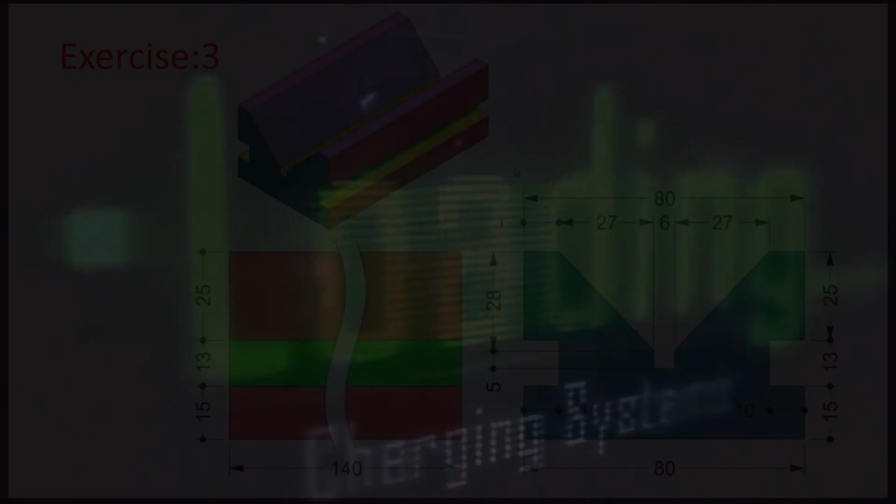Let's get started. Hello viewers, this is our third exercise using Autodesk Fusion 360. This is a very simple model. We will sketch half of the model, mirror it, and finally extrude it with a specific depth of 140 millimeters. Let us start our modeling using Autodesk Fusion 360.

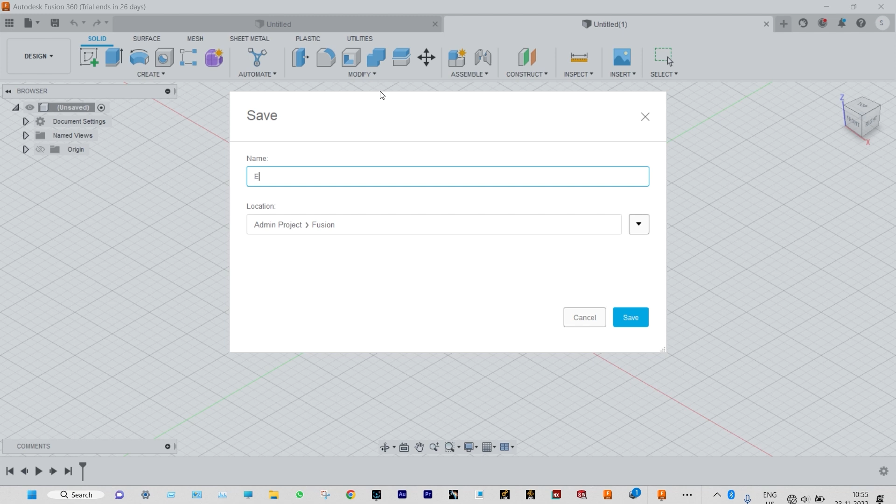First of all, we need to create a new design and save it with the name exercise 3, in a folder named Fusion. Let us save it. You can see the model is named exercise 3. While starting sketching, as we told before, we need to start from the front plane, selecting front plane. Okay, done.

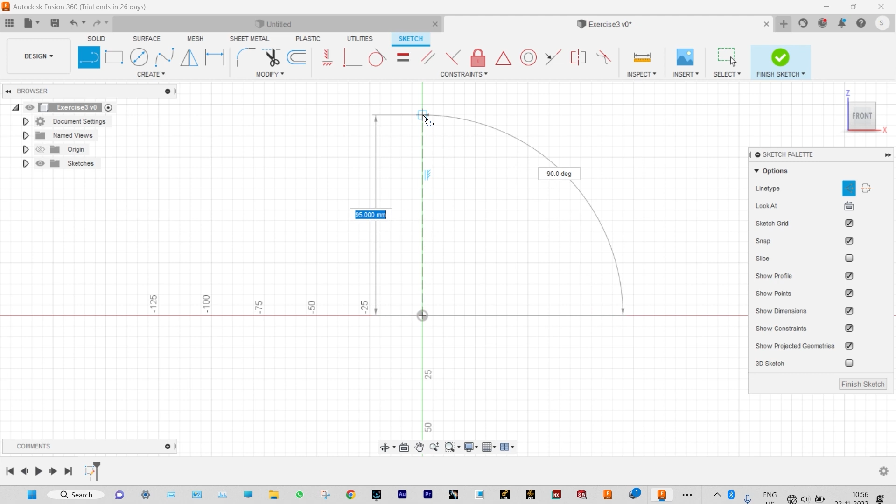As we told, we need to make one half of the model and mirror it. So initially we'll make one reference or construction line, with respect to which we need to make a mirror of that sketch. We select construction line from here and make a line. This will be the reference for the mirror line. Now we need to change the line type from construction line to a solid line. You can see the drawing again for understanding in a better way.

Initially, we need to move from this down position horizontally 40 millimeters because total length is 80, so we'll start here. It will be 40 millimeters. Then it will move vertically by 15. Again horizontally, it will move to the left by 10 millimeters. Next it will move vertically by 13 millimeters. This way it will move, right?

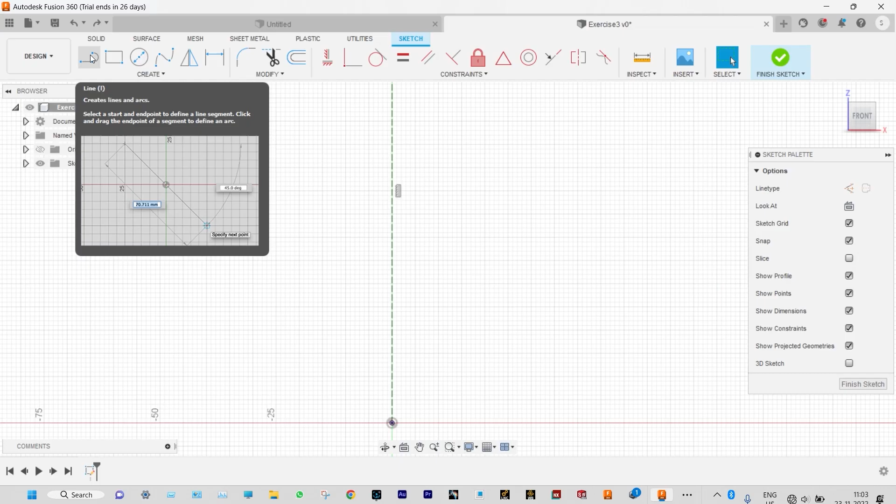So we are starting with a solid line. From this location, we need to move horizontally to a length of 40 millimeters. Enter. Now from here, move vertically up to a height of 15 millimeters, write 15 and enter. Again move to the left a length of 10 millimeters, write 10 and enter. Now move vertically up to a height of 13 millimeters, write 13 and enter.

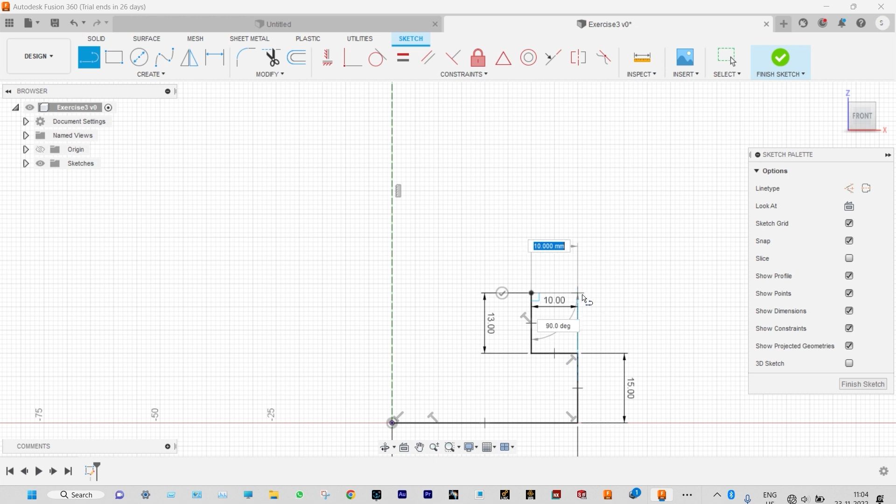Again move horizontally to the right a length of 10 millimeters, write 10 and enter. Then move vertically up to a height of 25 millimeters, write 25 and enter. Then again horizontally move left by 10 millimeters, write 10 and enter. Next to that, we need to make one inclined line.

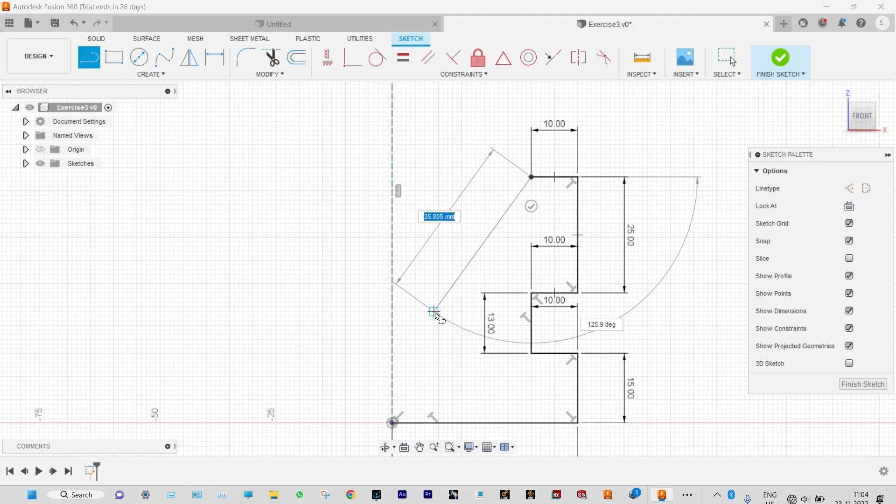This one we'll make at random, and finally provide smart dimension to this one. Let us make any inclined line from here to here, and then from that location come down by 5 millimeters, write 5, enter. Then join vertically here itself, right?

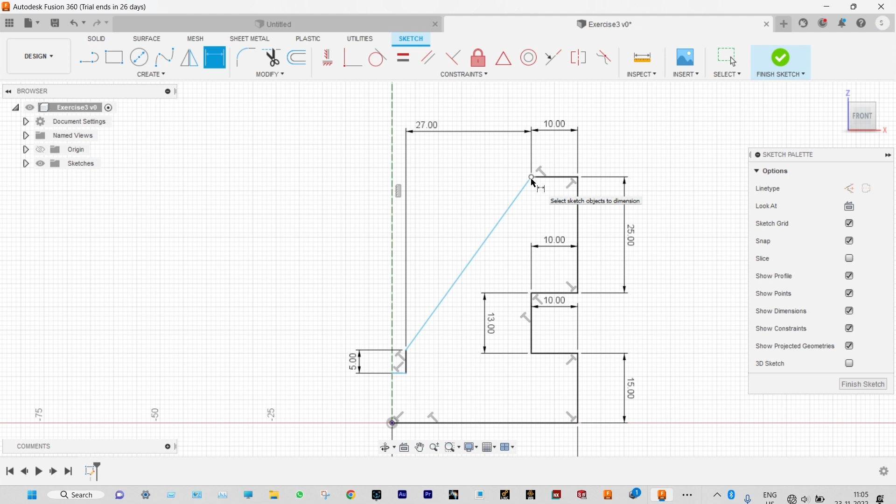Now we can provide smart dimension to all these things. This one, from here to here, the distance will be 27 millimeters. So we start smart dimensioning from here to here as 27 millimeters. And again vertically it will come down by 28 millimeters, so from here to here it will be 28 millimeters. Write here 28 millimeters.

Done. This is 5 millimeters already made, and this one will be driven, which will actually be 3 millimeters. So this is complete as per our drawing.

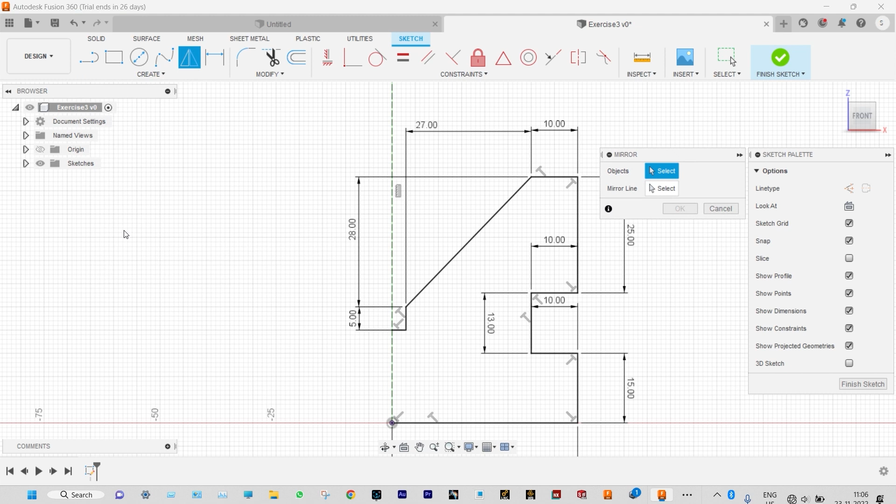Now we need to make a mirror of this one with respect to the construction line. So we create a mirror. We need to select the objects. By dragging, we can select all the specific lines. Now we need to select the mirror line, which will act as a mirror line. So our mirror is complete. We can accept this one. Mirror is complete, right?

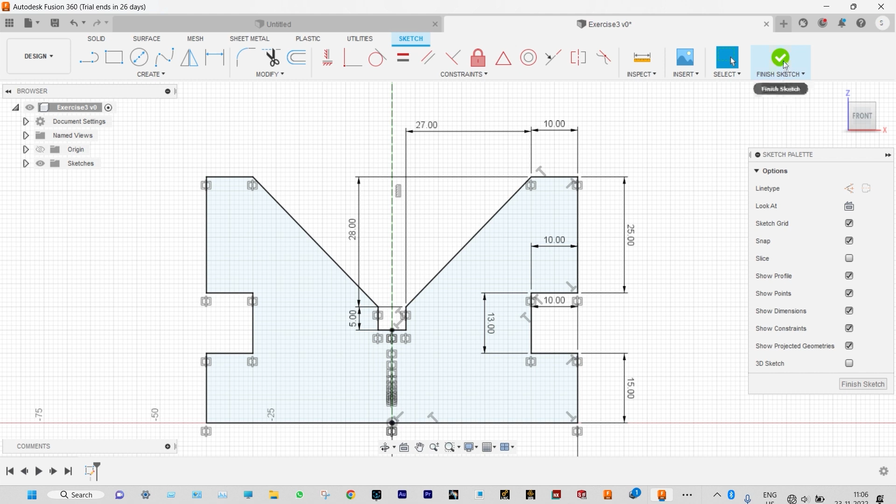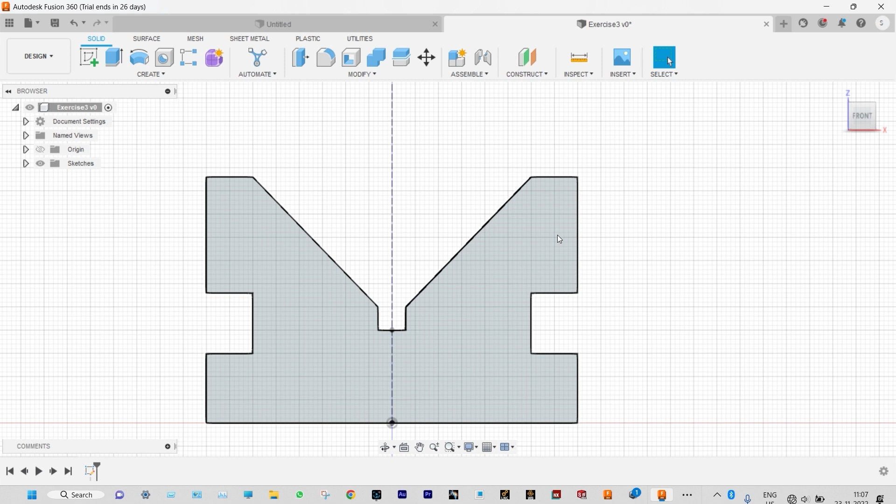As the sketch is complete, we can finish sketch and extrude it to a specific depth. Let us see the drawing again to see how much it should be extruded. We can see that extrusion depth should be 140 millimeters. So we start our modeling again: extrude, and the depth of extrusion should be 140 millimeters. We write 140, enter.

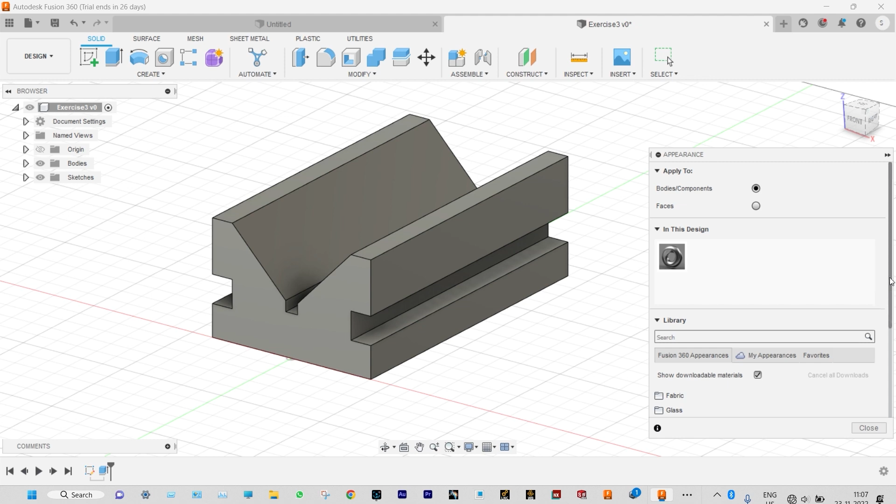The drawing is made, you can see that model. This is our final drawing. To provide a better appearance, we can click the shortcut A and provide metallic color to this one. Let us select from the library, it will be metals, and let us consider this one to be made up of polished copper. Let us drag this one to the model. We made this one, this is done. So close it, right? You can see this model.

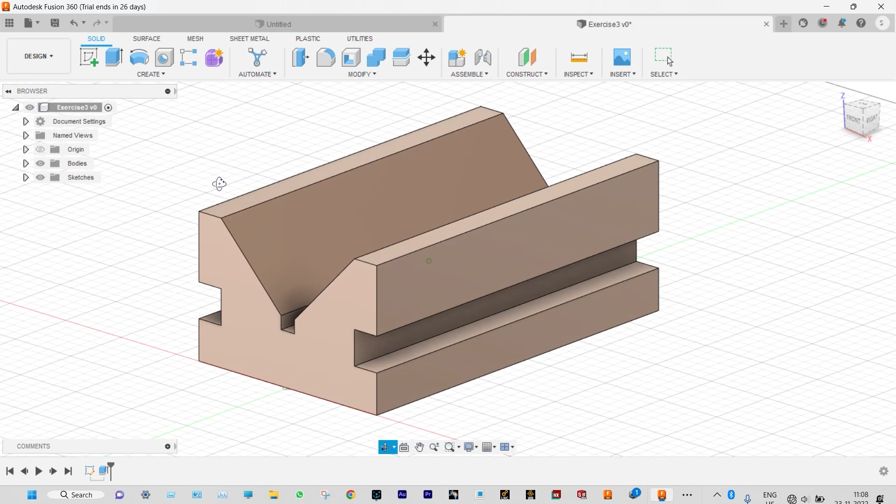This is a very simple model. What we made: one half of the sketch, then we made the mirror of that one, and finally extruded it to a specific depth. So with this, we'll conclude our today's third exercise.